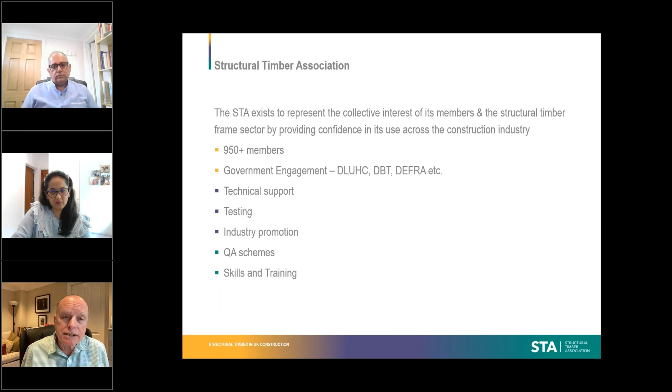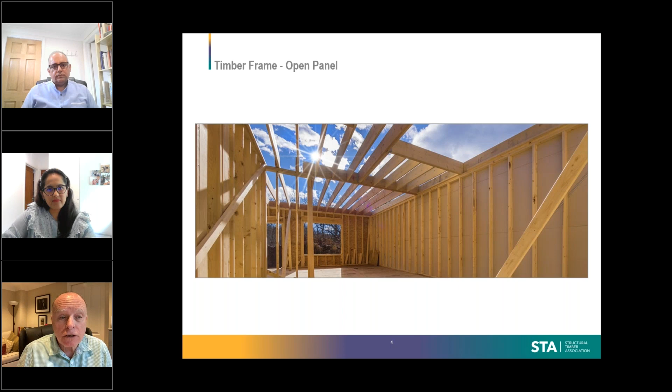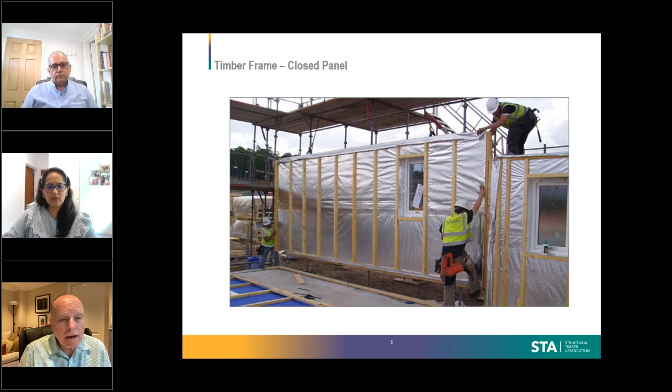So in terms of who we represent, what you're seeing here is what I call traditional open panel timber frame. We can flick through these. The next one, please. This is closed panel timber frame, where we do more with the system. Next is pre-insulated, where we add insulation. Then the next one is structural insulated panels, or SIPs, and finally cross-laminated timber, CLT.

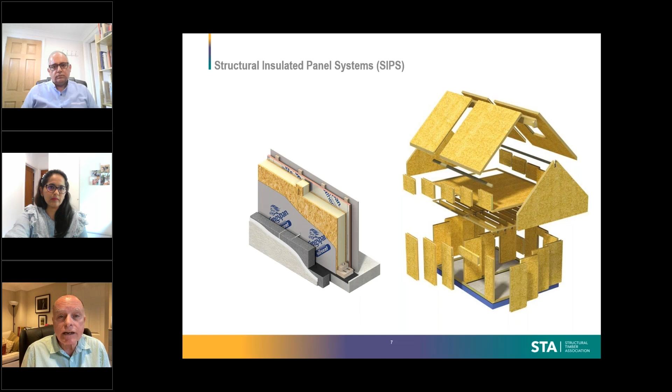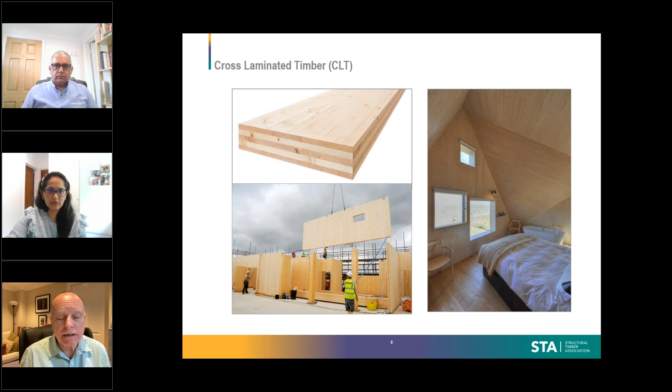Now, what I would add, as a trade association, we took the decision a few years ago. Lots of new products and systems coming into the market, but we deliberately chose to stick with panelized systems as a trade association because these have been tried and tested both in the UK and around the world over many years. But at the moment, we don't represent the volumetric or modular side of the sector, and that was a decision that the board took. And you might say that, given what's happened in the last few months, that was a very sensible decision. Okay, the next slide, please.

So why are more and more people now looking to off-site solutions, modern methods of construction, different terminology? These are some of the reasons that I've drawn out. Improved health and safety, because it reduces working at height being carried out on site, so you're in a factory environment. Tighter tolerances that you can achieve in a factory.

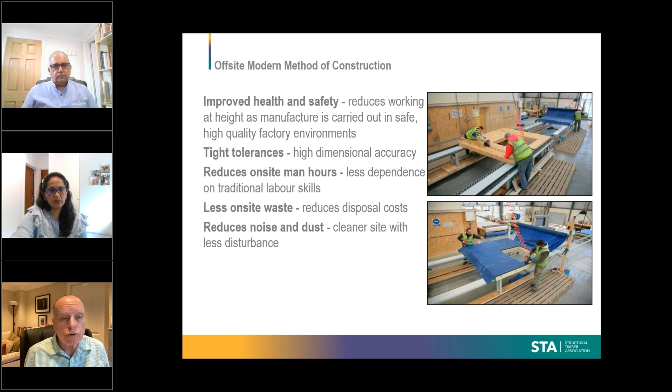We talked about skills early on, so reducing the man hours on site, less dependency on those site skills, less waste, considerably less waste, and of course less noise and dust, cleaner sites, and so on. So these are the reasons that more and more people now are moving towards off-site solutions. The next slide, please.

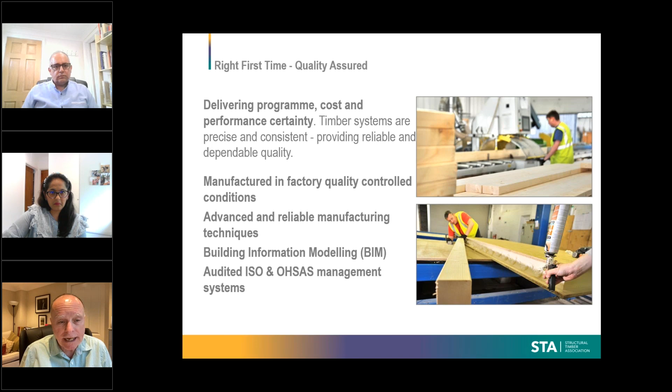The quality assurance is key. I'm going to keep coming back to that because it really is something that we build our whole emphasis around: the quality assurance, delivering programs to cost and performance, manufactured in these quality controlled conditions with advanced manufacturing techniques. We incorporate BIM, you won't be surprised to know, into everything we do, taking the designer's model straight through to the factory, and audited by ISO and OHSAS management systems. Thank you.

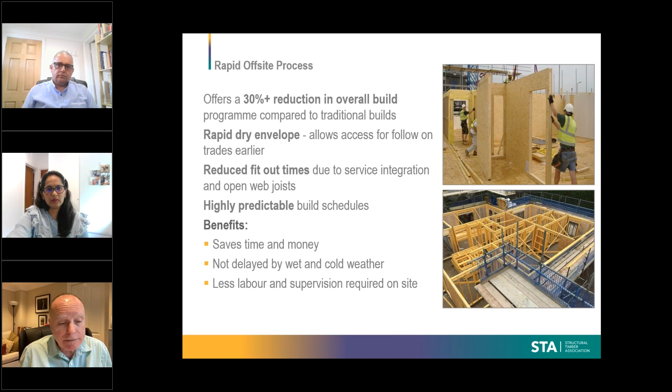So therefore, if you're using this offsite system, you're saving time and money. You're not delayed by the weather, with less labour. Thank you. Next slide, please. Thank you.

Now, when you think of timber construction, immediately you think of thermal performance. Performs very well, so exceeds building regulation requirements and assures SAP compliance. U values typically range from 0.22 to 0.10. Air tightness down to as low as 0.6 air changes per hour.

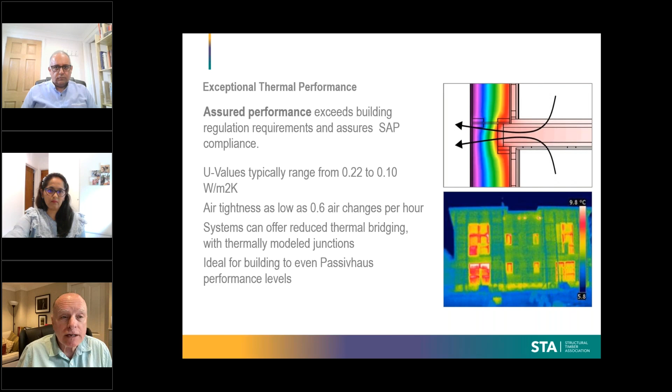Systems can reduce thermal bridging with these thermally modeled junctions that we're seeing, and are therefore ideal for Passivhaus, which is being required more and more, if not Passivhaus itself, something as close to it in terms of the UK. The next slide, please. Thank you.

Now, all these things around quality, you always have to look at the cost model, because if it doesn't stack, it's unlikely to happen. So what the offsite timber frame system can bring you is predictable and reliable build costs, less prone to variable site costs arising from poor workmanship, weather, etc.

that we talked about. Lower lifetime costs thanks to the energy efficient structures, which is one of the reasons why, for example, housing associations consider timber frame, because the energy performance of the finished product is better. So therefore their residents are able to afford the energy costs. And also it's lightweight, so it reduces expensive foundations. And this is particularly pertinent when clients want to build upwards on existing buildings.

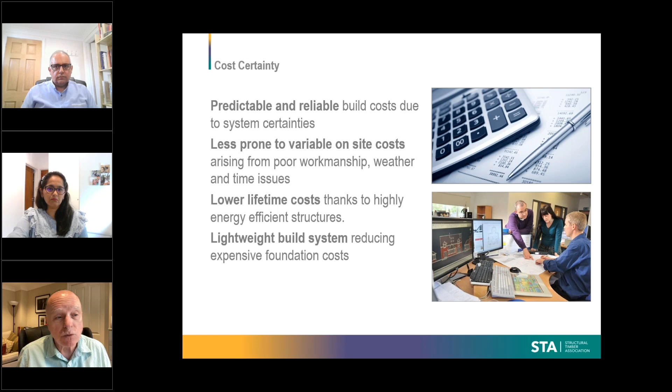I was in Australia not long ago, seeing a CLT structure 10 stories above a 6-story structure that was already in place. So the fact that it's a lightweight building material is another reason why it's often selected. Next slide, please. Thank you.

Some people are under the misinterpretation that if you build in timber frame, you're going to get a timber clad building. That isn't the case. Really, what you're doing is you're replacing the structural element. But in terms of the elevation treatments, you can have whatever you want: brick, stone, render, cladding, tile, timber, whatever you want, and whatever is the requirement of the local planning committee, the local vernacular. So broad variety of finishes. In fact, from the street, you wouldn't know it was a timber frame building. Next slide, please.

Okay, importantly, what I'd like to talk about now specifically is the direction of travel that the UK government is taking with regard to timber in construction. COP26, difficult to believe, but it happened about 2 years ago in November 2021, in Glasgow. I was there as part of the CLC Construct Zero board.

And the next month, DEFRA, as chair, launched a government timber in construction working group. Other departments such as, well, it was BEIS at the time, but now it's DESNZ, and Department for Business and Trade, DLUHC, Forestry Commission, all sit on this interdepartmental group. And the one objective, the single objective, is to safely increase the amount of timber used in construction.

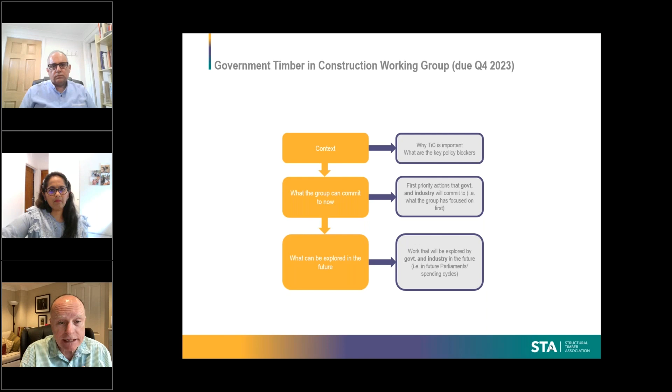We looked specifically at 6 areas. So 6 areas where we thought there may be barriers to increasing the amount of timber in construction. We did workshops on these, you know, the blue sky thinking workshops with post-it notes and so on. And we boiled down some questions in each sector that needed answering.

So the first thing we looked at was timber supply. How could we increase the amount of timber in construction? How could it be met? If we're going to increase it, have we got the raw material? You know, i.e. in the low, medium or high increase scenario, how much more supply would that involve? And could it be realistically met by the British timber industry, and when and why?

So if I give you some figures, the sort of figures we're looking at the moment across the UK, about 22% of all houses are built in timber frame. Now that's skewed by the Scottish figure I gave you earlier of 80-odd%. In England, it's 9 or 10%.

But the question we're asking is, you know, what would we do in terms of supply if we made that increase? The Climate Change Committee are indicating that their ideal increase would be 80%. They want to see that 80% figure across the UK. As a worst case scenario, they want it to be 40%. That would still mean doubling the amount of timber frame used in 27 years' time.

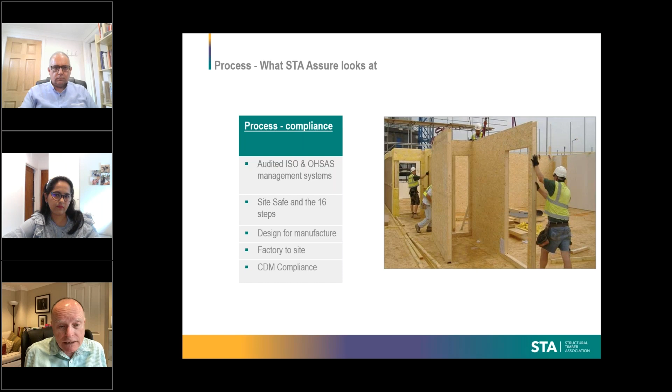And finally, process. So you can see, I mentioned this earlier, but ISO, OHSAS. We have something called Site Safe. I'm going to talk about that in a minute, and 16 steps. We use design for manufacture, factory right through to site, and then CDM compliance. You won't be surprised with that. It's a requirement. Next slide, please.

But these are the things that we require: the Site Safe, STA complaints procedure, using competent erectors and installers, because we do have an erector installer scheme as well. We want to make sure that the whole process from design through manufacture to installation is assessed. CDM compliance, STA Assure third-party assessment. They're common to all three. If you could move on, please. Thank you.

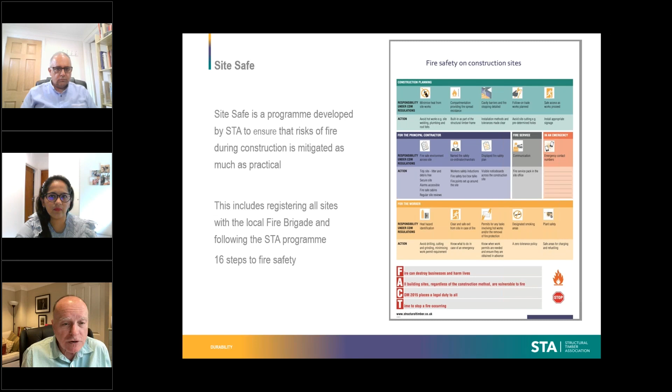Also, on the next slide, you'll see we've got similar agreements with LABC. In fact, I was speaking at their conference only last week. Premier Guarantee, Protek, Build Zone, Self Build. So you can see that the warranty providers are beginning to acknowledge the STA Assure, which is great from our point of view, because our fear is that about 85% of all the timber frame members are members of the STA, the big members obviously, but there's a tail of non-members, and we're fearful that they might upset the apple cart for the rest of us if they don't perform in a responsible way.

But that's it. Thank you very much for your time. I hope I haven't gone over too much, okay. But I'm sure there's too much. Thank you. That's okay. Thank you. That was a wonderfully comprehensive presentation. Just going back.